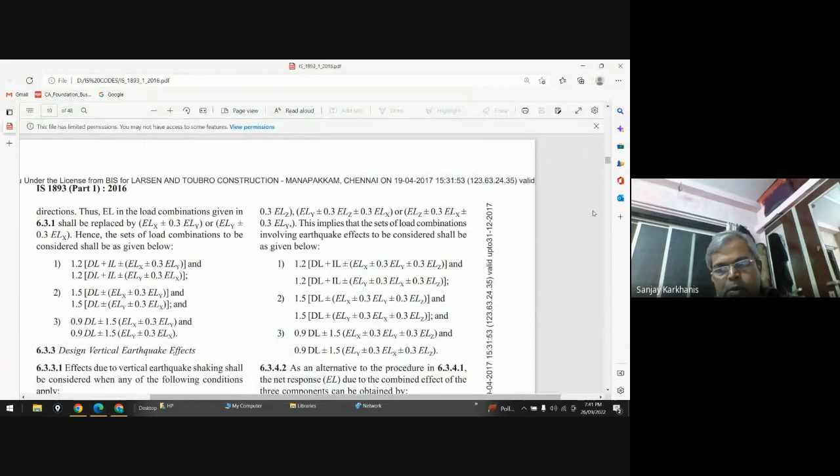Okay, so let us open that code. I have already opened it, and you can see, so this is the code. So let me go to this. This is the criteria for earthquake resistant design of structures, part 1, general provisions and buildings.

That means there will be part 2, part 3, and you may see. So this part 1 is dealing with general provisions and buildings. Another part may be dealing with bridges or some special structures, stack-like structures, etc. So if you want to go for codal provisions regarding 1893, you will have to see part 1.

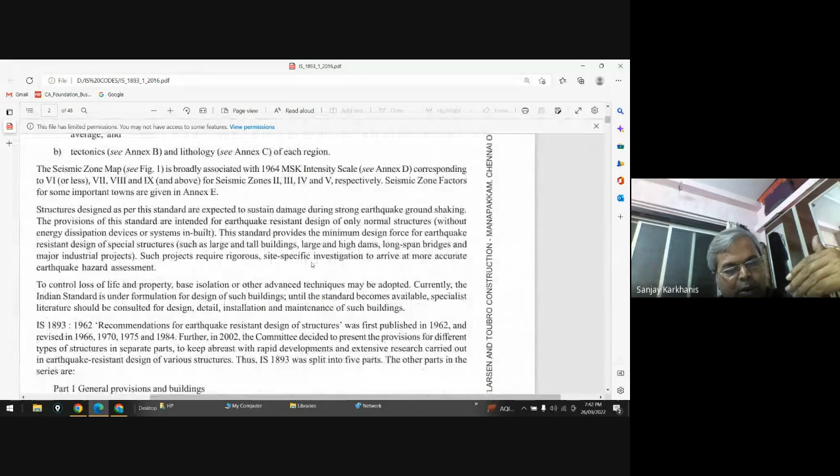So you can see that this is a sixth revision, and you will find the scope of this codal provision. You can see that primarily it deals with earthquake hazard assessment for earthquake resistant designs for buildings, liquid retaining structures, bridges, embankment, retaining walls, industrial and stack-like structures, and concrete, masonry and earth dams.

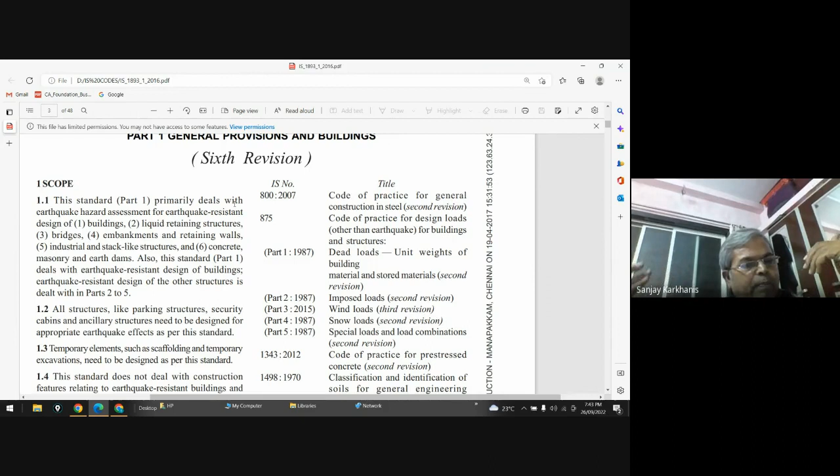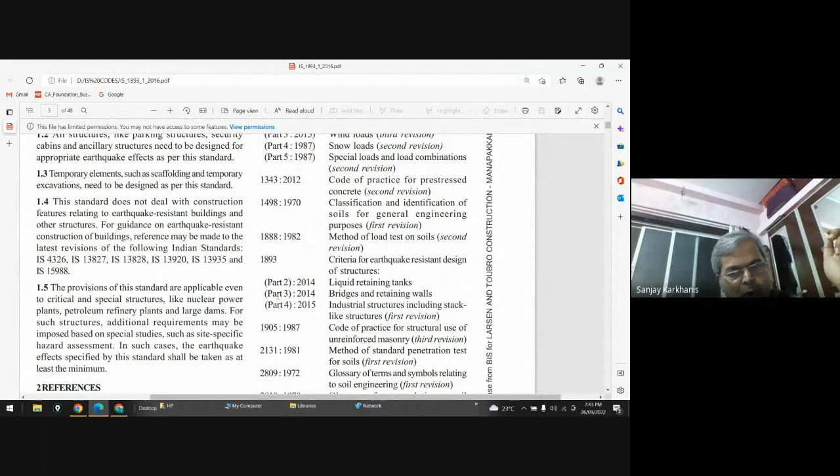This standard, part 1, deals with earthquake resistant design for buildings, and earthquake resistant design of the others is covered in parts 2 to 5. That means 1893 is divided into part 1 to 5. You can see that part 2 is liquid retaining tank, part 3 is bridges and retaining walls, part 4 is industrial structures, and then these are the references which I was working with.

Then you can see the terminology section. So if you see here, it starts with terminology - whatever definitions are given, and these definitions you will see in various books also, but for this reference they have included them here. So what do you mean by closely spaced modes? Particularly this I would like to look at, and I would like to have a few comments about this.

You can read it, but conceptually, I will try to show you that closely spaced modes of the structure are those natural modes of oscillation of a structure where natural frequency differs from each other by 10% or less of the lower frequency.

Now let me show you that. Let us say you have defined one structure - let's say this could be a structure something like this, 1, 2, 3, etc., whatever it may be. And with respect to free vibration analysis, you have found omega 1, omega 2, then omega 3, etc., then omega 4. So let's say these are the circular frequencies of the first 4 modes of vibration that you have analyzed with that vibration analysis.

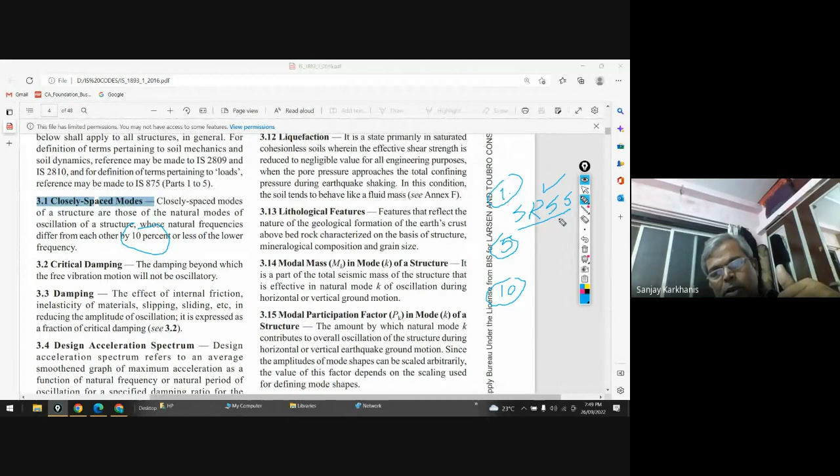But if the frequencies are very close to each other, let's say 1.05, 1.07, or 1.1, that means the code has given you 10% or less of the lower frequency. Then this SRSS method cannot measure the effect of mixing of one frequency, or the interference of one frequency on another frequency. So this method cannot properly detect that effect.

That's why you are using CQC. So calculation of SRSS and calculation of CQC, I will say, is an advanced process.

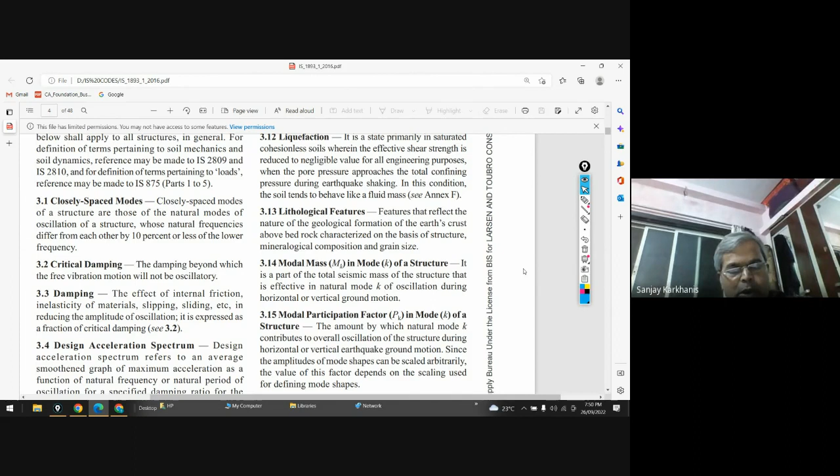So now you can read this closely spaced mode definition. In your interviews, one may ask you why you are calculating closely spaced modes, or why you want to check whether the calculated frequencies are well separated or they are mixed with each other. What is the necessity? And then you people will not understand if this concept is not known to you, right?

Okay, yes sir. Now this is about critical damping. What is damping? The effect which decreases the oscillation over a period of time is called damping, through physical friction of the medium.

Actually, damping is a very complicated process. A lot of things are coming into picture so that the damping effect occurs. Now we are not interested in finding all the parameters of why damping comes into picture. We are just interested in what is the effect of damping. So, the effect of damping is a reduction in amplitude.

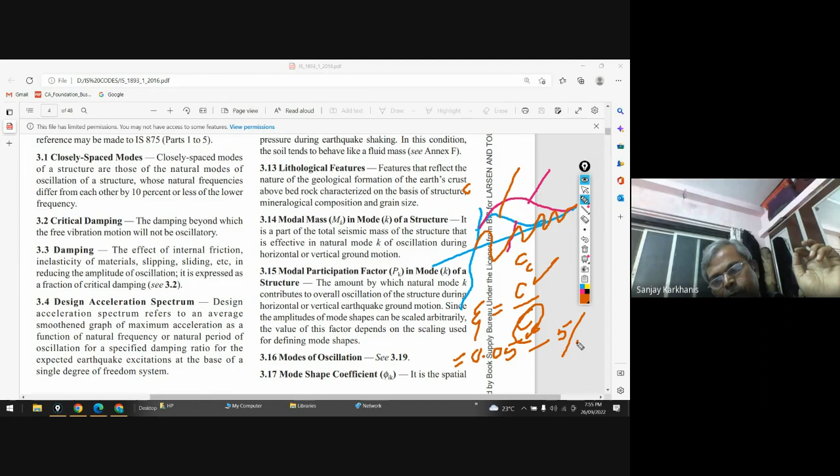Yes sir. And that's why whenever you are going for your ETABS model, it asks what is the percent of damping. That percent of damping is nothing but xi, a value of xi expressed as the ratio of actual damping over critical damping, and critical damping is defined like this.

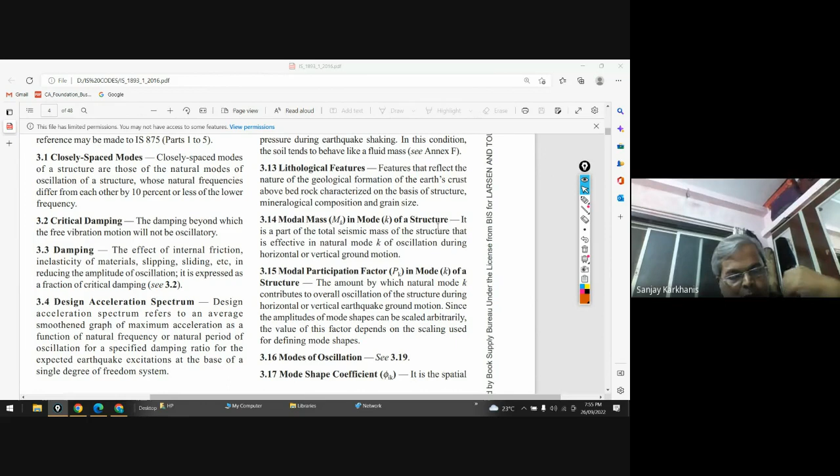Yes, I think conceptually you are getting into the scene or not? Yes sir. Are you getting bored? No sir, not getting bored.

Okay, no problem, a little boring I will make it because that's my right. The effect of damping as defined in our code, the effect of internal friction, inelasticity of material, slipping, sliding, and whatever may be, all these effects which reduce the amplitude of oscillation are expressed as a fraction of critical damping.

And exactly that is what I have given you as C upon CC. C is actual damping, and CC is critical damping, and damping is expressed in ratio xi. So this xi is nothing but damping.

I have explained this design acceleration spectrum, which is the average smoothened graph of maximum acceleration as a function of natural frequency and natural period of oscillation for a specified damping ratio for expected earthquake excitation at the base of a single degree of freedom. This is very important, and I would like to spend a little bit time on this.

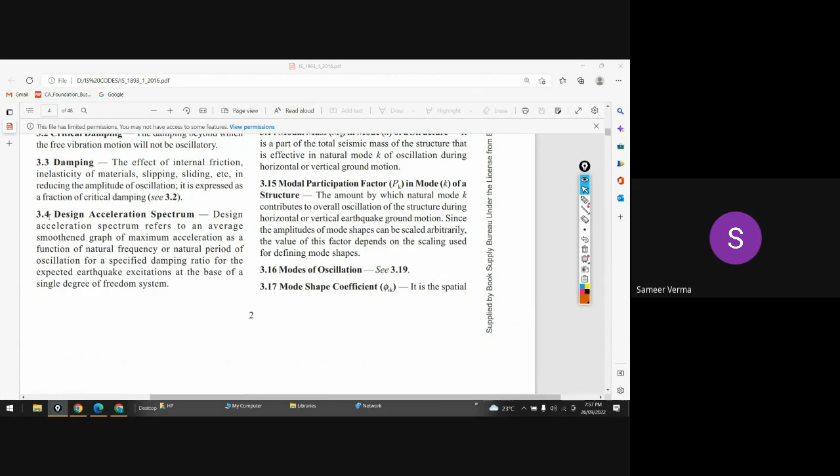Have you understood this? Yes sir, design acceleration spectrum, but why it is defined and how it is used.

See, my question is that when you are going to study the effect of earthquake on various buildings, you will see that earthquake is very notorious, and every time it is having different parameters. Let's say you are staying in one area, and that area is subjected to earthquake. Now that area may get subjected to earthquake from any distance.

As the focus is near to you, you will be subjected to higher vibrations, and you don't know where the focus is, because if you try to visualize the earth, you will see something like this. Inside the earth, there may be anywhere a focus, and you may be anywhere on the periphery of the earth. So you do not know anything.

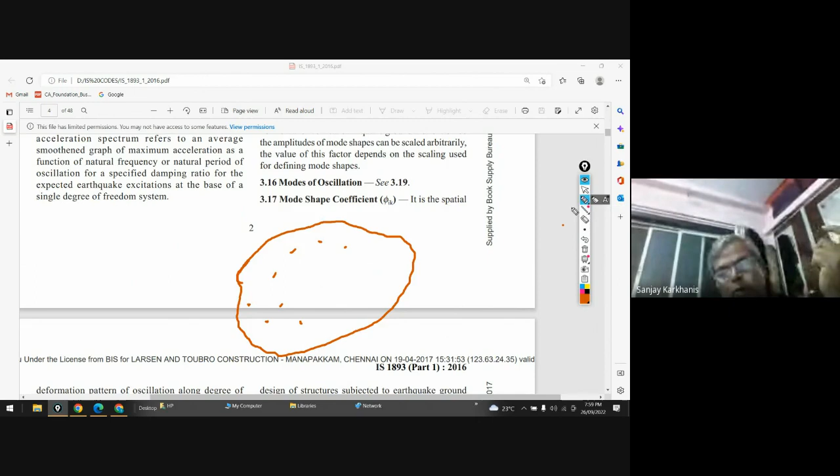So how are we going to analyze things where we do not have any information? That's why some standardization has been prepared. Because every earthquake will be different, let's say this is the surface of earth, and there is a building something like this, then there will be another building, then another building. Now every building is having different parameters.

Are all buildings the same? No sir, requirement will be different. This may be a residential building, this may be a hotel, this may be some part parking, some part commercial, some part something else. You may have a huge structure, maybe a stadium, maybe a theater, etc. So every structure is different.

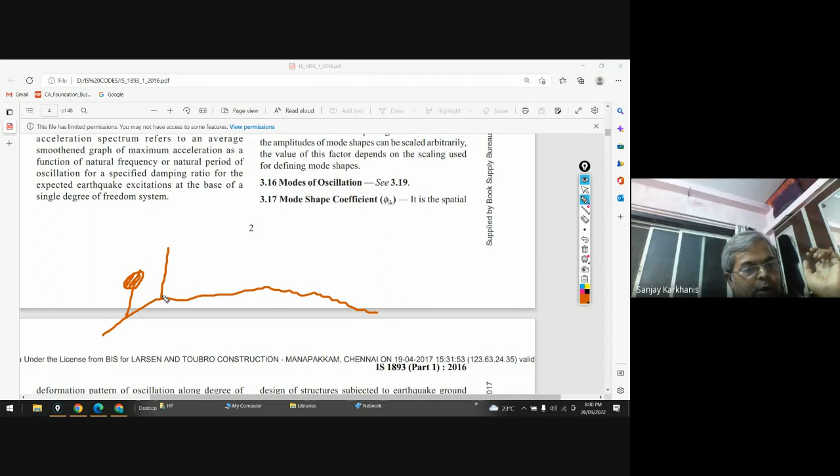That's why they say let us find the effect on a single degree of freedom. So they are considering this as a theoretical structure, this as another building having single degree. Now we are not talking about multi degree, we are having single degree structures.

So all these are single degree freedom systems. We are representing the building as a single degree freedom. So this will have one frequency, this will have another frequency, this will have another frequency, and I am talking about the character of the building.

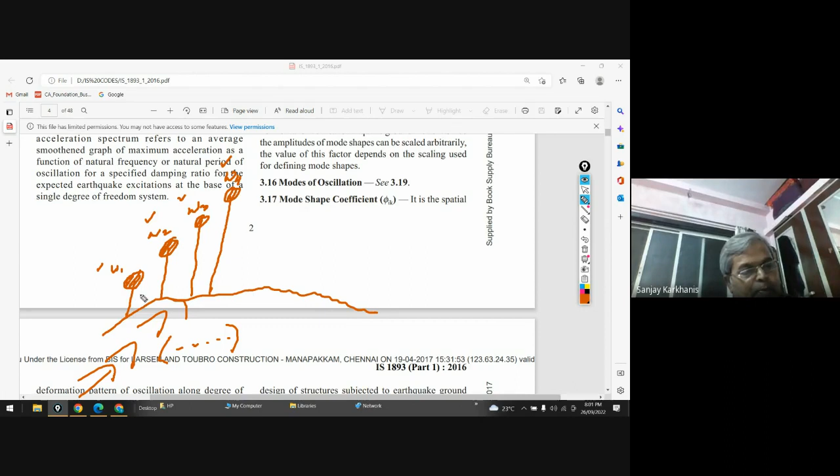And now there will be an earthquake. This earthquake itself will have a bunch of frequencies. Few frequencies may be near this, maybe near this, maybe near this, and maybe near this. And the building will get distorted or deformed to its higher level only when the frequency matches.

Let's say f1, f2, f3, etc. So there are n number of frequencies that this earthquake is carrying along with it, and earthquake is changing its frequency at every fraction of a second. It is not that earthquake has only one frequency, it has a bunch of frequencies along with him, and every fraction of a second it is changing its frequency.

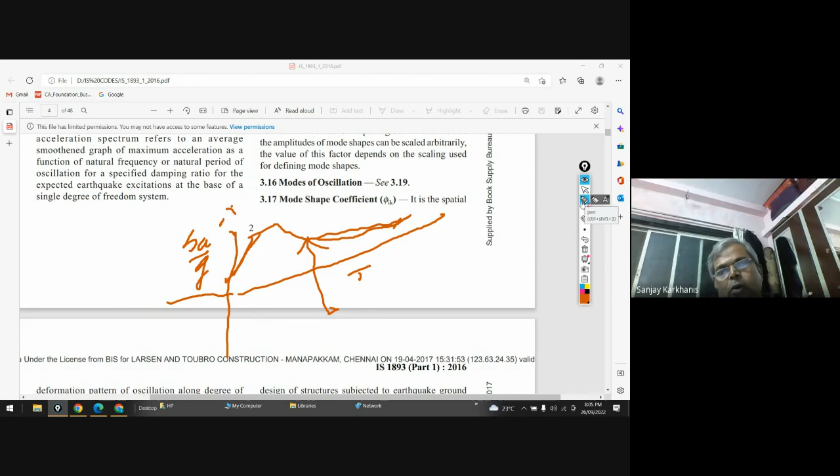Many times when I ask people how you can use this response spectra to analyze your building for some probable earthquake, because you are designing a building for some future earthquake to safeguard it against one which has not yet occurred. You will get the data only when that activity is exercised. Then how do you say on what basis your building will resist? Because this response spectra is having...

n number of earthquakes. Let's say this is one earthquake, and this is the data of available earthquakes. Then there will be another earthquake, so maybe something like this. Then there will be a third earthquake.

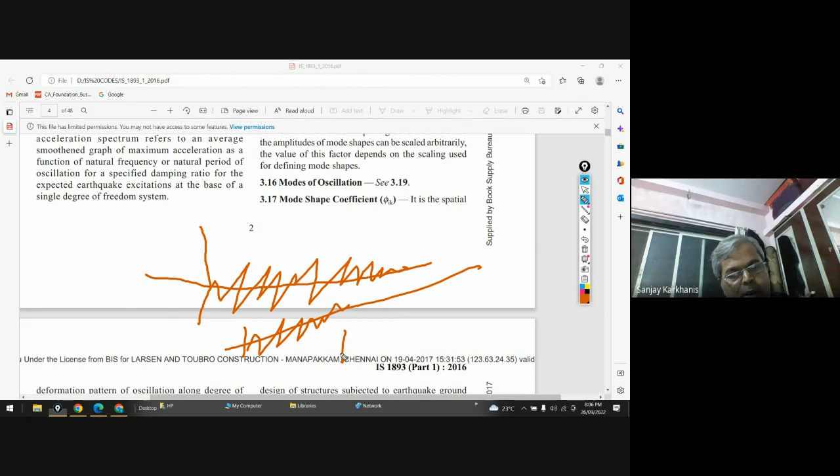Yes, sir. That's why we can see that at least, though I don't have data of a future earthquake, still I can predict, because I have gone through thousands of previous earthquake data which has been analyzed, and some information is drawn with that, and that is why this design acceleration spectrum means number of such earthquakes.

And why it is called design? Because it is not truly representing any actual data, it is representing an average smoothened data.

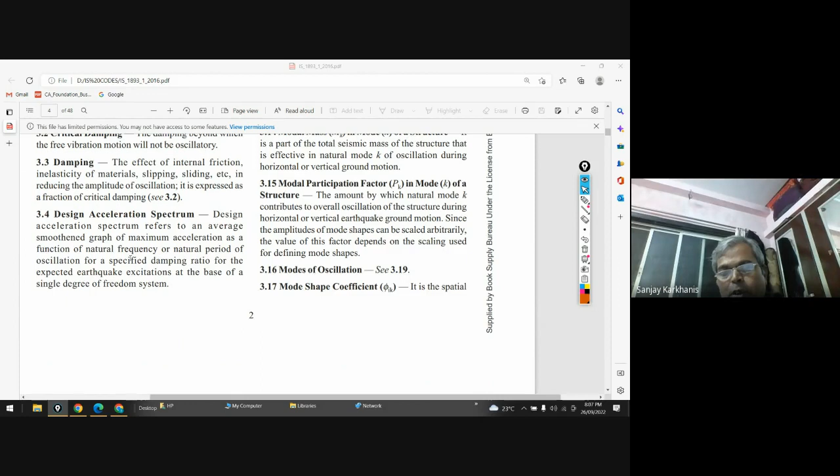Is this concept clear to you? Average smoothened data. Yes sir. So it is not actually representing any data. Say, with actual calculation you are getting your structure something like...

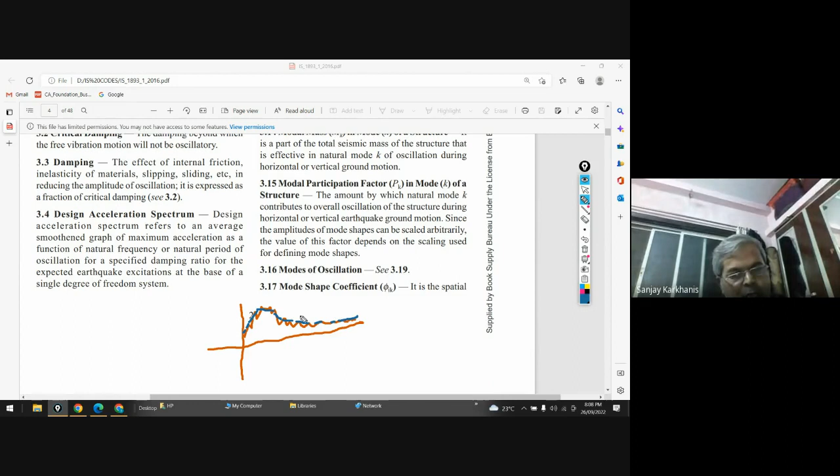So this output, which has been the outcome of various earthquakes, it has been smoothened, like this, and that's why you can see this blue line is this design. That's why it is called design spectrum, and it is of acceleration. That's why it is called design acceleration spectrum. Clear? Yes, sir. Okay.

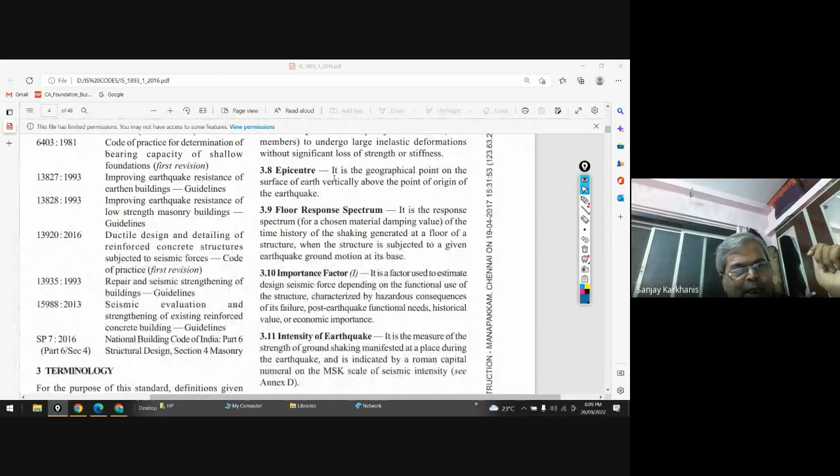So like that, you can go through this: acceleration, horizontal force, ductility, you can go through this. You can go through epicenter, then floor response - this is not used by us most of the time, so you can ignore it. Then importance factor, you can see that.

Now you may have some more information about intensity of earthquake. What is the difference between intensity of earthquake and magnitude of earthquake? You can go through the books to understand. Try to read the book, and if you do not understand, next time I will explain the difference between intensity and magnitude of earthquake, right?

Now, how is intensity measured? Intensity is measured with respect to the damage that has been considered. So that damage is defined in 1 to 12 categories.

It's not because of the earthquake, it's because of whatever situation on the ground you are having. Let's say if any desert has been shocked by the earthquake, what will be the damage? There will be no damage because there are no human activities in the desert, right? Are you getting it?

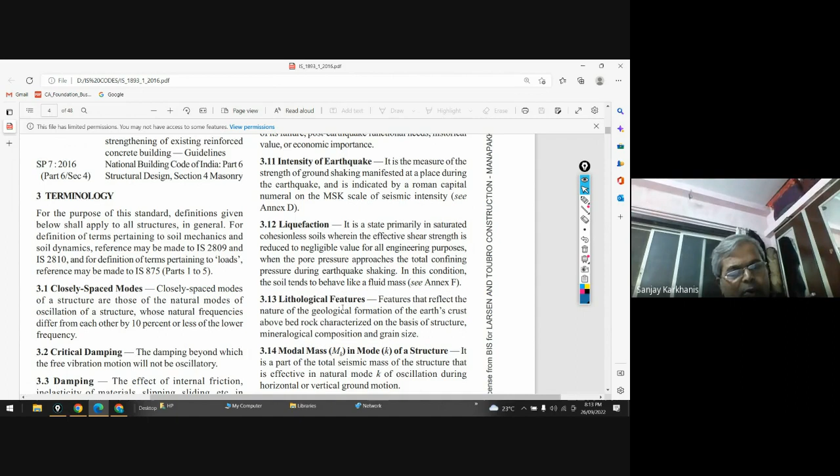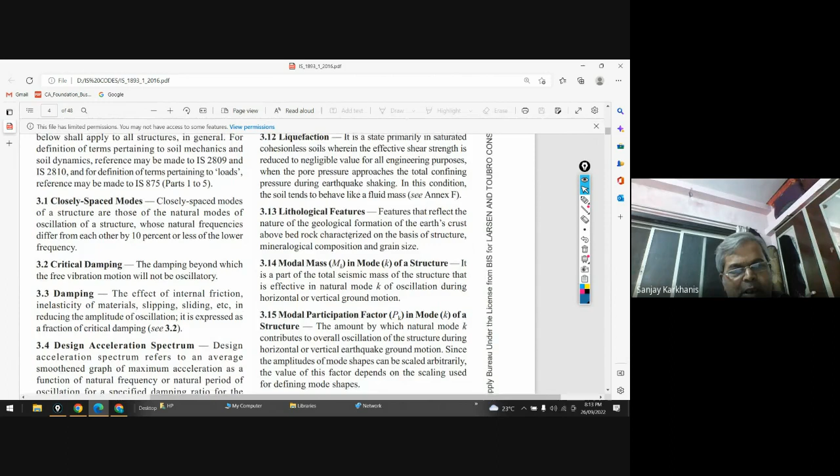Don't look into liquefaction because it is a rare activity. If you are interested in lithological features, then you may go through them, since that is a part of geology.

Here you can see modal mass. I have already explained this concept, so I'm not going to repeat it - modal mass, modal participation factor, modes of oscillation, mode shape coefficient. I have already explained all these things, so you can just go through this.

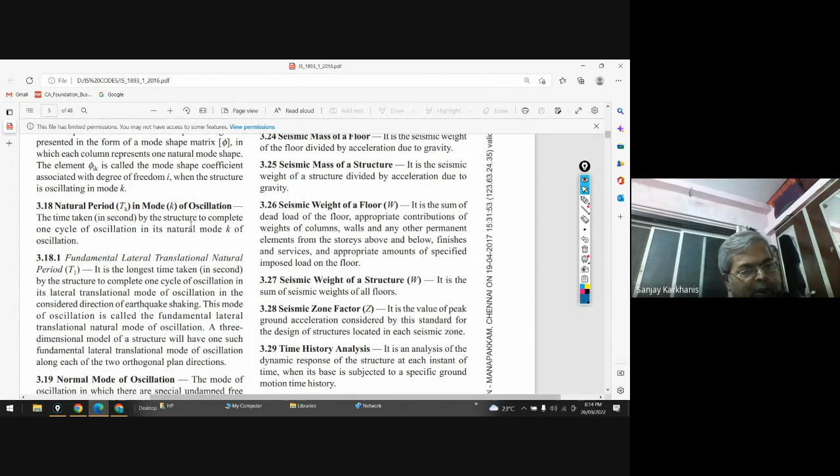What do you mean by natural mode period or natural period of mode K? Also fundamental lateral translational natural period, and modes of oscillation - these are the definitions.

Peak ground acceleration - this is a concept where a number of people get confused. It is expressed as zero period earthquake or zero period earthquake intensity. How can I define it? We'll work on it later. Even if you do not understand much about this right now, try to ignore it till your understanding level keeps increasing.

One thing is there - I have observed people do not read this codal provision because the moment they start reading it, they find it very difficult, and with a number of terms they do not understand, they feel that this is not meant for them, and they quit. Don't do that.

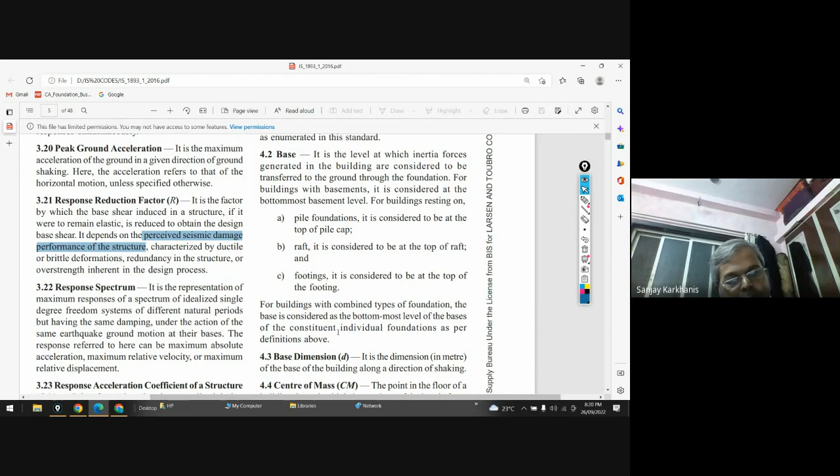And where it is related। मैंने आपको बताया था कि यू कैन नॉट डिजाइन अर्थक्वेक प्रूफ स्ट्रक्चर। सो उसकी वजह से वी हैव अ प्रोबेबिलिस्टिक अप्रोच, and the approach is that if the structure is subjected to minor earthquake।

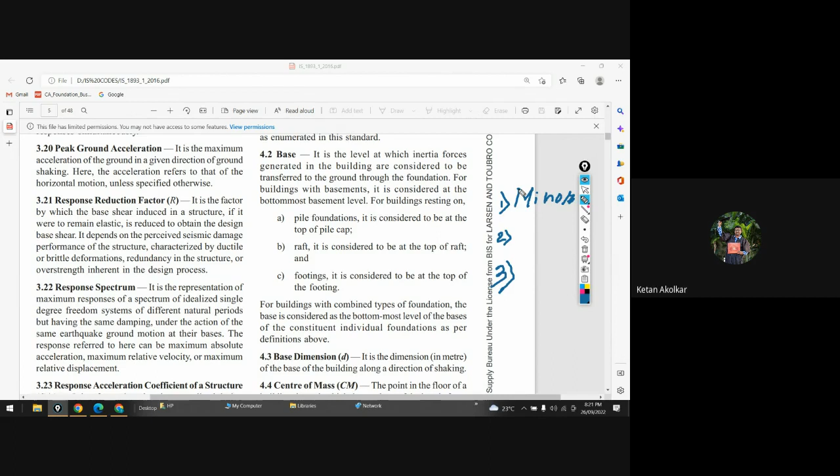छोटा मोटा होता है ना, ये ढाई-3 रिश्टर स्केल वाला। आप लोग हैं कि नहीं मेरे साथ? Okay, see a structure, you don't know what intensity of the earthquake your structure will be subjected to। तो आपने क्या किया कि मान लो आपका स्ट्रक्चर माइनर अर्थक्वेक को सब्जेक्ट हो जाता है, which is something around 2 to 3 Richter scale।

सो ये जो इंटेंसिटी है ना, दिस इज कॉल्ड अ माइनर मैग्नीट्यूड ऑफ द अर्थक्वेक, यानी माइनर अर्थक्वेक। थोड़ा सा हो जाता है, एक 2-3 सेकंड या 5 to 10 seconds, and then things are okay, normal। So when the structure is subjected to such minor earthquake, the probability is almost more than 70% that your structure will be subjected to this, maybe within 1 or 2 months, or once or twice or thrice in a year, which we do not notice। बट अगर वहां सिस्मोग्राफ अप्लाई करेंगे बिल्डिंग में, तो हर 2-3 महीने में आपको उस अर्थक्वेक का सिस्मोग्राफ मिल जाएगा। So the earthquake is there, but you don't notice, and under that type of structures, your structure behaves in elastic manner।

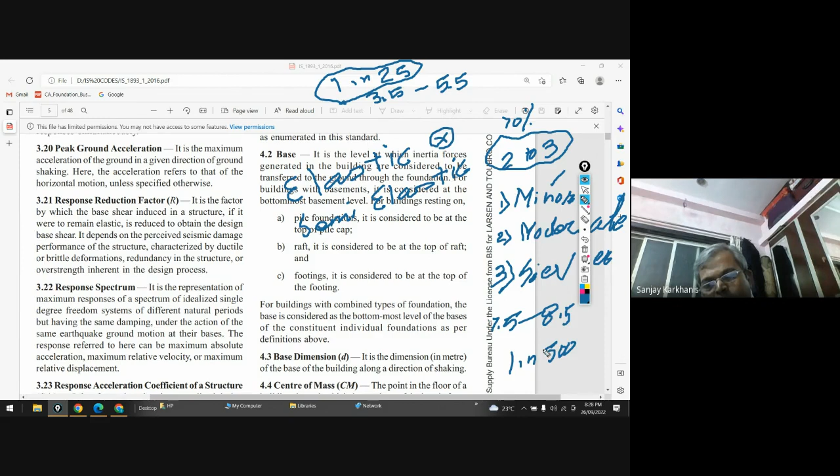Under severe shaking, a strong jolt, under this severe condition maybe something more than 7.5 to 8.5 magnitude. This is severe, and the probability of this is 1 in 500 years, maybe, or 1 in 1000 years, or 1 in 250 years.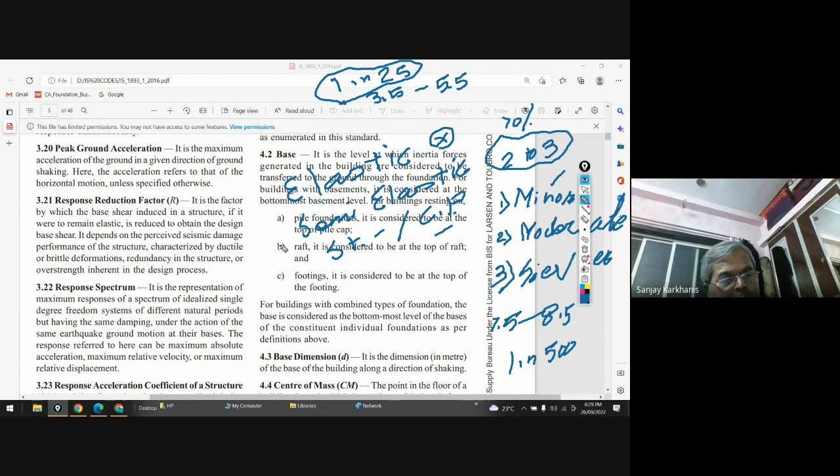In that case, structural members also get damaged, but the building will not collapse. So collapse is prevented, CP, so that people in the building will not lose their lives, but they will survive and get enough time. That is all defined in perceived seismic damage performance of the structure.

Clear? Clear, sir. Now this perceived seismic damage performance of the structure is characterized by ductile behavior. That is what I was saying. I am not going to allow brittle deformation, but I will allow the structure to behave in a ductile manner, and then there will be redundancy in structure.

You know what is meant by redundant structures. Because of that also, the structure is having a factor of safety, and you are not designing the structure only for the exact required strength. You are going for over strength, designing for some higher value. So that is also called over strength inherent in the design process.

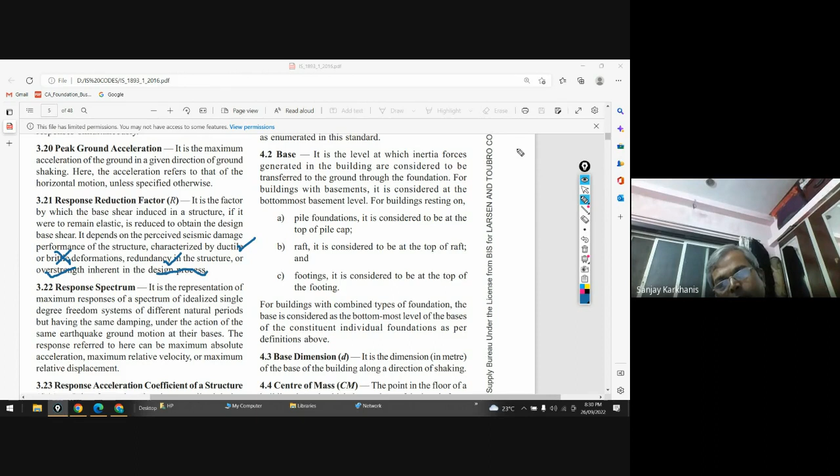I think you will enjoy reading that. Yes, sir. So this is how you have to read this.

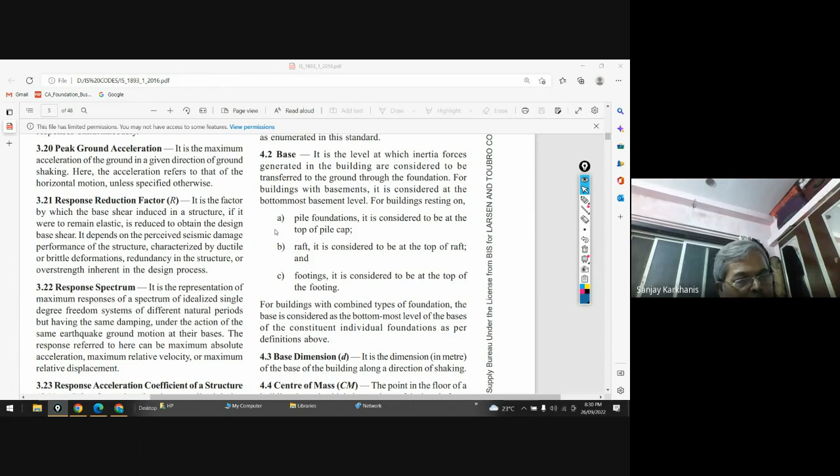Then I have given enough information about SA by G. Then you can see all the rest of the structures. You know all this, I think we have covered all this.

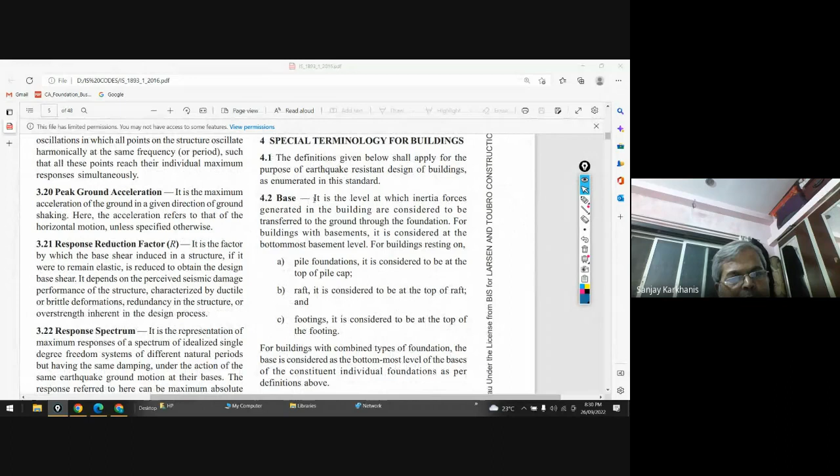So the main special terminology for building is base. What do you mean by base? Then base dimension, center of mass, then center of resistance, then eccentricity, we have talked about it. Then design base shear, then diaphragm, height of floor, height of building.

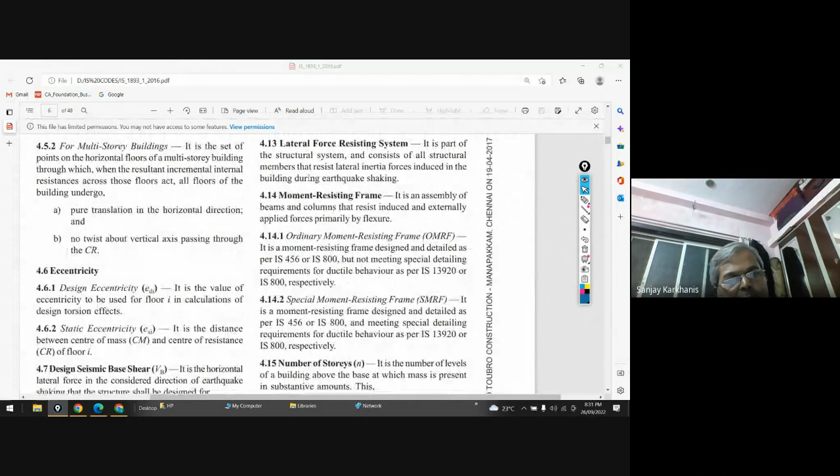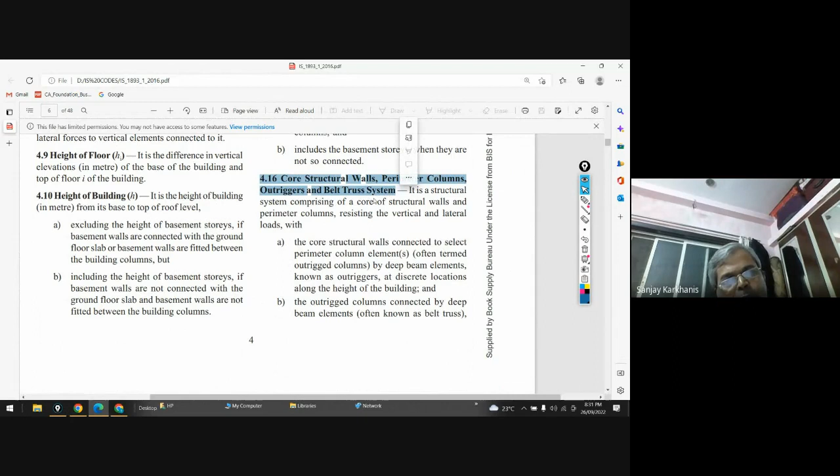Then you can go through horizontal bracing system, joints, then lateral force resistance system, moment resisting frame, then the various parts. You can read it and you will understand it. If you do not understand this section 4.16 initially, you may ignore it for a few days and later you will start understanding this.

Then you can see principal plan axis, then this P-delta effect. If you do not understand P-delta effect right now, forget about it, you will understand it later. Then RC structural wall, we have talked about it. Then story, then what do you mean by soft story, weak story, and drift.

I think we have talked about this, and will also, let me show it with the concept. Let's say this is your floor, and earthquake force is subjected. The lateral forces due to earthquake are acting in this direction.

Because of that, let's say you're having displacement like this. So this is your delta 1, and this is your delta 2, the lateral deflection. Okay, and this is your floor height, let's say H. Then delta 2 minus delta 1 is called relative displacement.

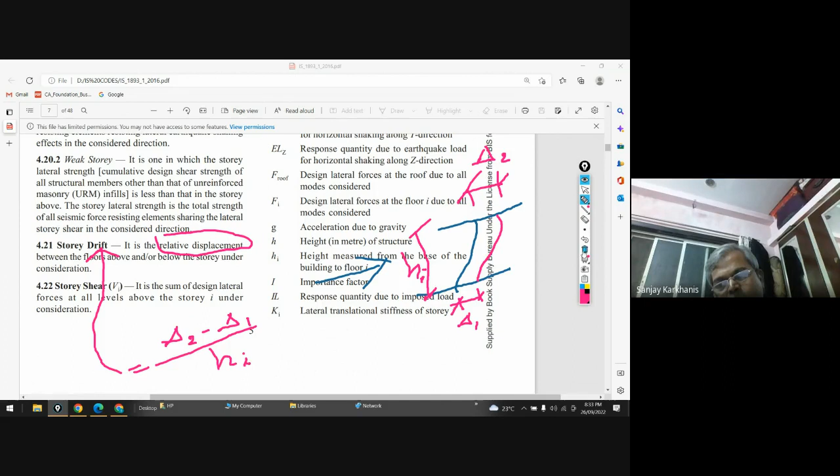Is this easier? Yes sir. Clear or not? Yes, clear sir. So now, if you get the model, you will analyze the model and find the story drift, and then you will understand the meaning of that.

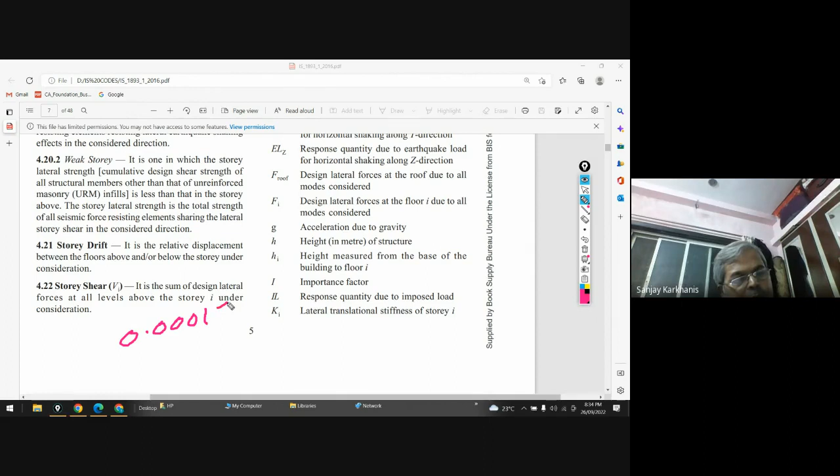Why I am showing you this is the reason for that is only this: you can say that in ETABS, you are getting a story drift value like delta 1 minus delta 2 divided by H. ETABS will always show story drift like this, so it doesn't have any unit, because delta 1 is in length unit and H is also in length unit, so that's why it's a ratio.

And there is always a confusion, people do not understand this value. They say, oh, the value came very small. But try to understand that it is delta 1 minus delta 2. If you see this in mm, you will be confused, you will think it came very small, but that's not the case. It's not with unit, because it is delta 2 minus delta 1 divided by h, which is a ratio, and based on that you can find the displacement. So relative displacement divided by floor height, that is story drift.

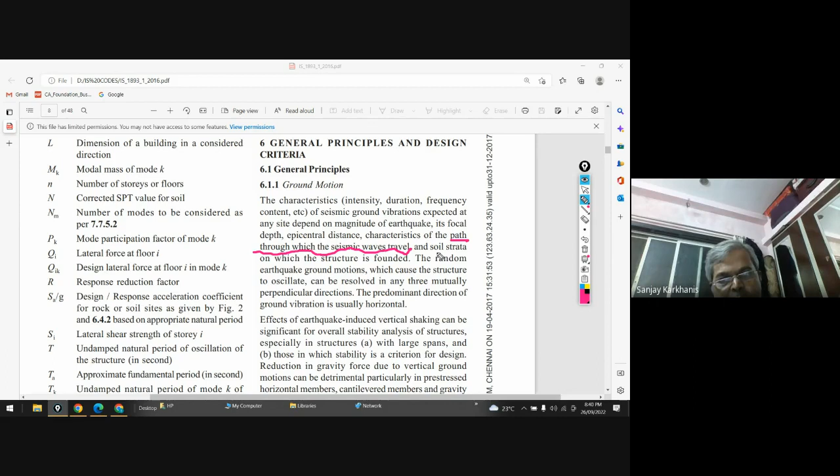Okay, so as this changes, this is what is called the path. What is the path? Wave. See, the wave is going like this, and this wave is obstructed, the medium will obstruct the wave. As you know, water lets the wave pass quickly, rock will take time, or if there's a gap in between, it will flow immediately. So that means material matters. So that is exactly the path through which seismic waves are traveling, soil strata on which the structure is founded, and random earthquake ground motion.

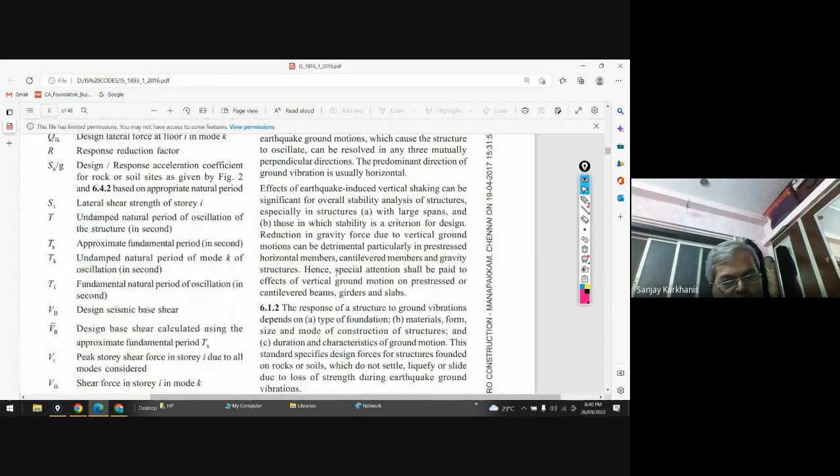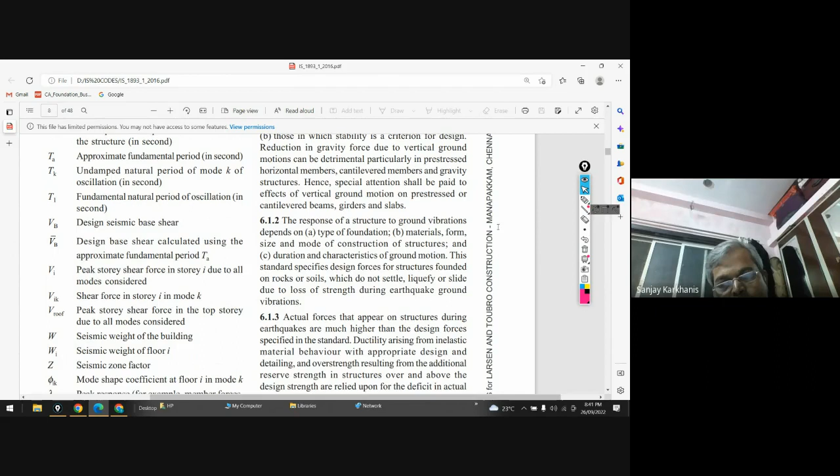So all these, I'm just mentioning the things. I won't be able to explain everything, but let's see what I can explain. So you can go through this, and if you do not understand, you can ask me specifically. If you've read it 2-3 times, even written it once, and still don't understand, then we'll have a separate discussion on that. Clear? Yes sir, okay, then you can go with this.

So this is about soil structure interaction. Don't go into that deeply because we are not using soil in our analysis. What is soil structure interaction? The structure is resting on earth, or earth is supporting the structure, and the earth is subjected to earthquake. Because of that, the nature of soil and different earthquake characterizations come into picture, causing the superstructure to vibrate. That effect is again transferred to the soil, and the soil transfers it back to the superstructure. That is called soil structure interaction. It's a complicated concept, you may keep this aside initially; later you will understand it.

People interested in earthquake engineering have done separate research, n number of theses only on soil structure interaction, and many have got their thesis sanctioned and received PhDs for it. So it's a vast topic, but if you're interested you can go into it, or if not, you can leave it. That will not hamper your normal analysis process.

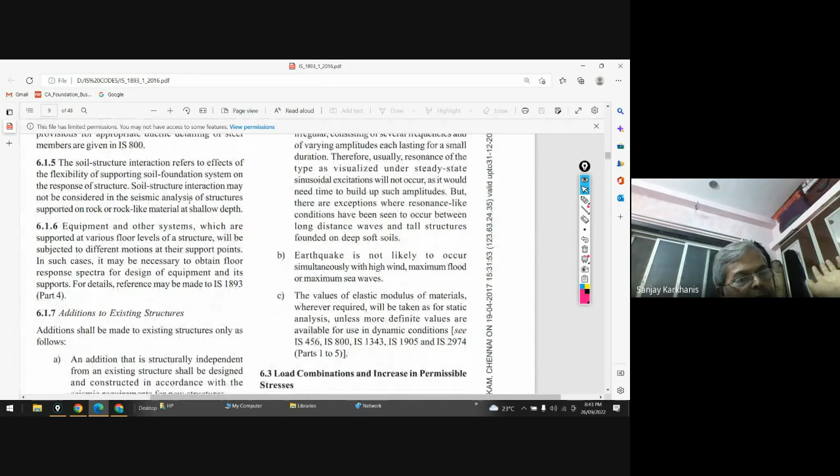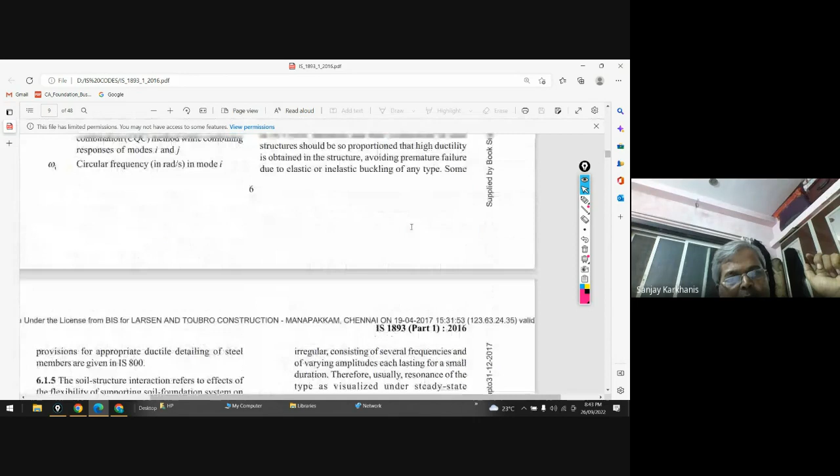Then equipment etc. you can go through. Change of occupancy is not required. You can go through these assumptions also, because these assumptions are important. Just go through that and you will find a lot of important understanding.

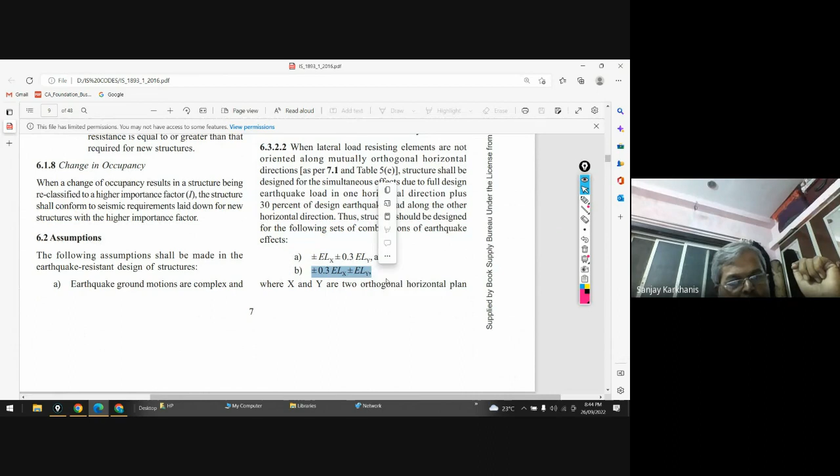Then load combinations, we have talked about this, and these are the load combinations. You can see ELX plus 0.3 ELY and 0.3 ELX plus ELY. Where did this come from? You can understand that over here. So these are the basic combinations, and with the help of these only we have developed all those 50 or 64 combinations. You can check and find it over here.

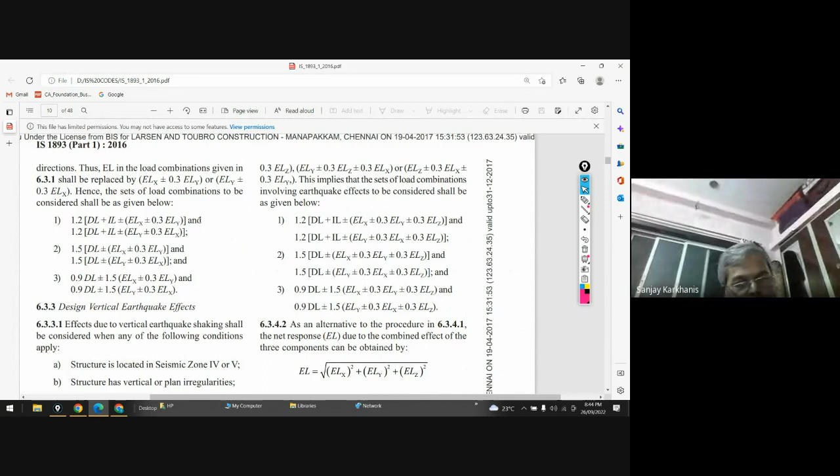Many people ask why we are not considering vertical earthquake effect. The clause 6.3.3 says that effect due to vertical earthquake shaking shall be considered when any of the following conditions apply - that means whether your structure is located in zone 4 and 5. In zone 4 and 5, you are supposed to analyze the structure for vertical earthquake effect also, that means EQX, EQY, and EQZ also. So that is one condition.

Another condition is when the structure has vertical or plan irregularities, meaning a very complex structure, you may say a complex architectural configuration - in that case also you will have to carry out analysis including vertical earthquake. Then structures resting on soft soil - you have seen type 1, type 2, and type 3 soil. If your structure is resting on type 3 soil, then you will have to carry out vertical earthquake analysis, find out the vertical earthquake effect, and take care of that in design.

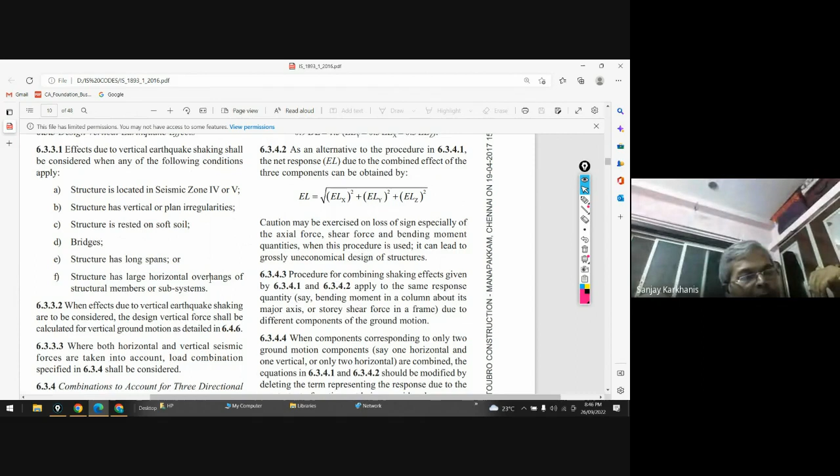Then bridges, and structures having long span. Even in residential structures, if the span of your beams or slabs is more than 10 meters, you will have to check this vertical effect. And horizontal overhangs - normally I ask architects to get rid of unnecessary overhanging balconies. Don't go for overhanging balconies, and don't go for unnecessary overhang in subsystems. If it is giving you some additional benefit, then you can go for it, but then you will have to analyze your structure for vertical earthquake also. Clear?

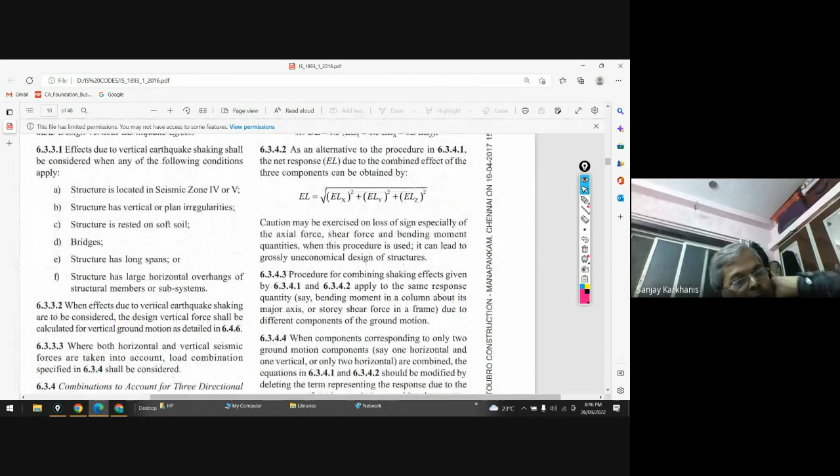Yes sir. Then this is about combination for three directional earthquake ground shaking - that's what we provide in directional combination. You might be recalling that whenever we were feeding information to our software ETABS about earthquake in dynamic analysis, we were saying that when modal combination is to be considered, go with CQC, and when directional combination is considered, you can go with SRSS. So that is this directional earthquake ground shaking, right?

It has effects in X direction, Y direction, and Z direction. If you want to combine all that, you will have to consider ELX plus 0.3 of ELY plus 0.3 of ELZ if you are going for 3D. Otherwise, 30% orthogonal effect. Clear? So one time plus, one time minus.

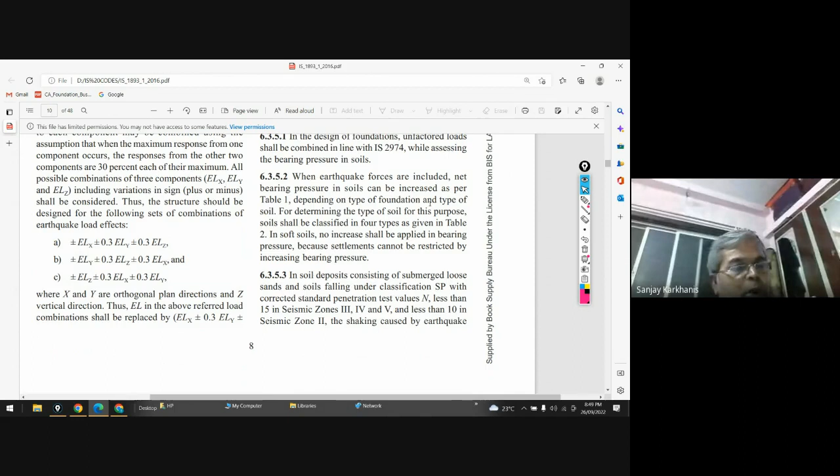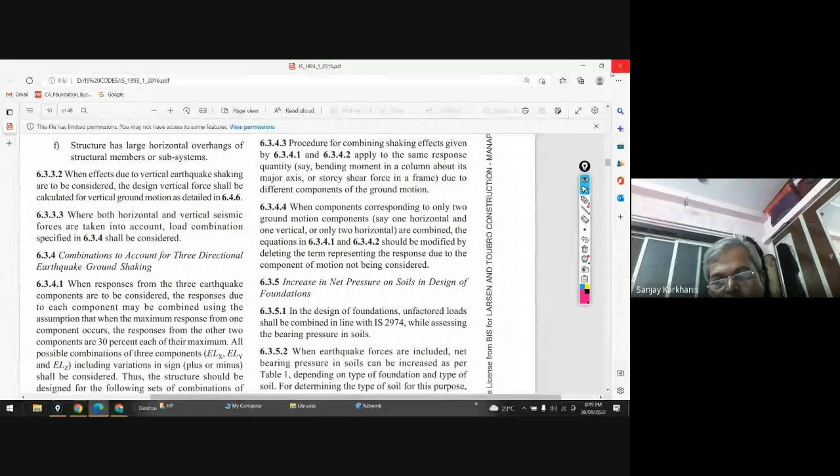But right now we don't have any problem, because finding the worst combination among all those results is the duty of software. So you can go ahead. Otherwise, manually it becomes very, very tedious. I'm not saying difficult, but tedious. So with this, you can go ahead and you can check.

And now all that we have seen in our PPT, you can correlate it with this design acceleration spectrum value, this Ah, Z by 2, Sa by g. We used to say earlier, we used to say I by R. Now we are saying divide by R by I.

I have not understood why it has been changed. Finally, it's saying the same thing, isn't it. Whether you write R by I in the denominator or I by R in the numerator, it is one and the same, but I have not understood why it has been changed. And earlier it was not like this.

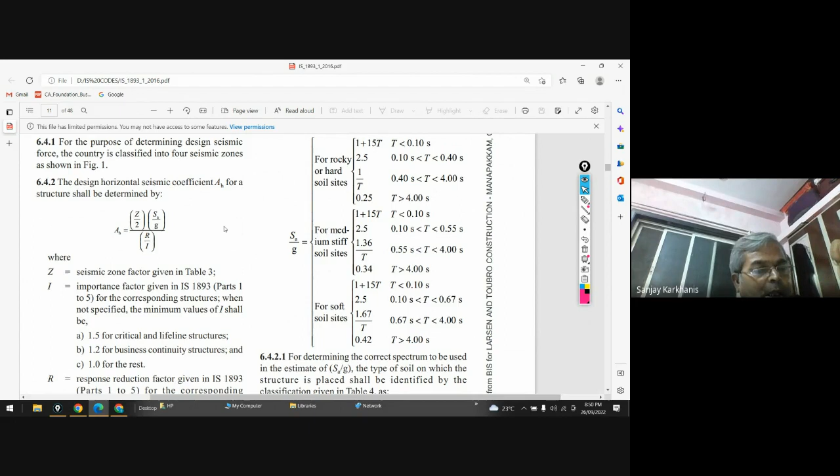So in 1893, 2002, it was written whatever we have given you, I by R. But now they have changed it and they say that Z by 2 into Sa by g divided by R by I. The only thing, probable thing that I want to say, but I am not confident, because nobody confirms this to me. I have asked a number of experts in this field why this has been changed.

But according to me, the code wants to have a parameter R by I, because in one case you are increasing importance factor, that is you are increasing it from 1 to 1.5, maybe 1.2, 1.3, 1.4, 1.5, and in another way you are reducing the response. So finally, such that R by I doesn't go beyond some value of 5.

Are you getting it? Yes or no? Let me do it. See, my approach is always that I used to say let us put it in a figure and find out what will happen. Let's say I'm not changing anything over here, so I'm not worried about this. Let's say my R is equal to 5 and I is equal to say 1.

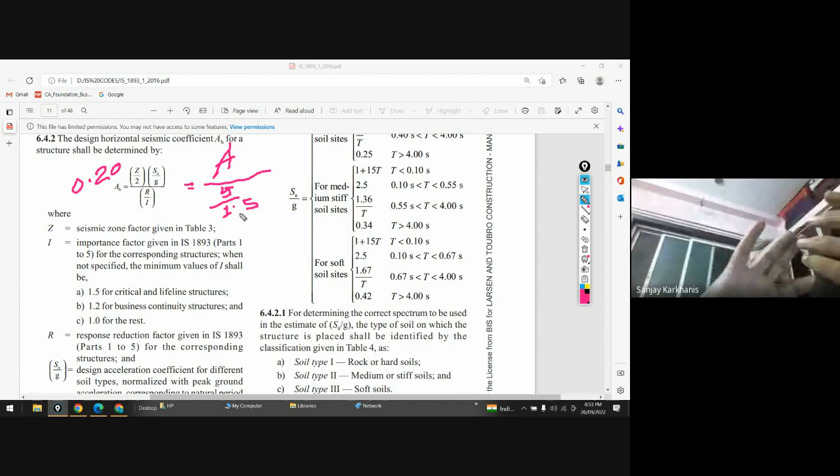What will happen if instead of that I'm going for R equal to 5, but now I'm increasing importance to 1.5, whether I am on safer side or I'm on unsafe side? What will happen? Finally, how much is this value? Yes, anybody? Just answer me, 5 divided by 1.5 is 3.33.

3.33, that means now under importance conditions, see, for residential building I'm going for 20%, and for important buildings I'm going A divided by 3.3, means 33%. So I'm increasing the base shear.

What will happen if I go for R equal to 3 and this equal to 1.5? So it will be 50%. See, 3 divided by 1.5, it will be 2. That means A by 2, that means 50%. Yes or no? Yes, sir.

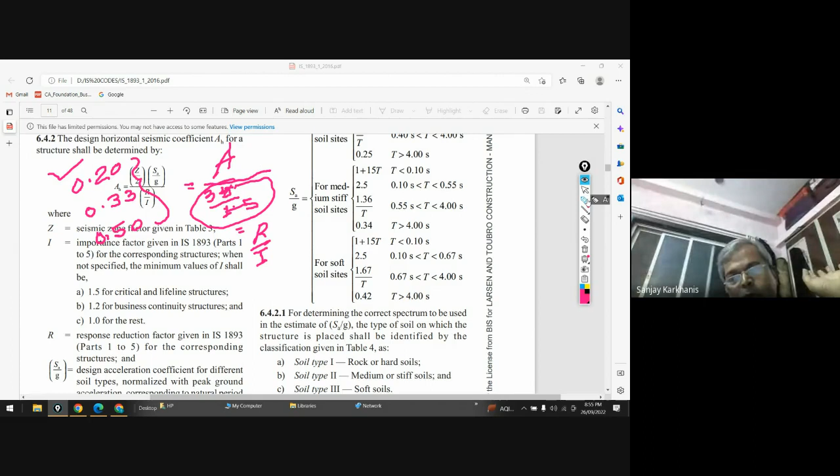So that is how I have analyzed, but I don't know whether my analysis is correct or not, because I tried to confirm it with 4-5 prominent experts in this area, but they say 'we can't tell, leave it, the code has given you R by I, just keep it as it is.' But I feel the code wants this some value. You should think a little more about this, it would be good.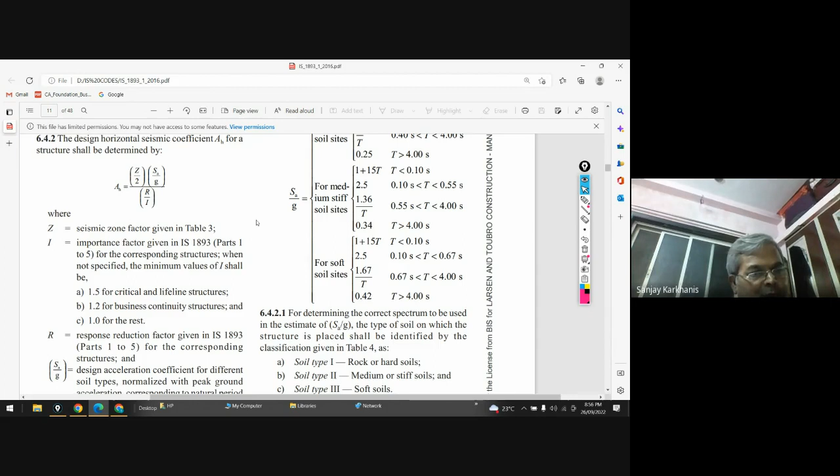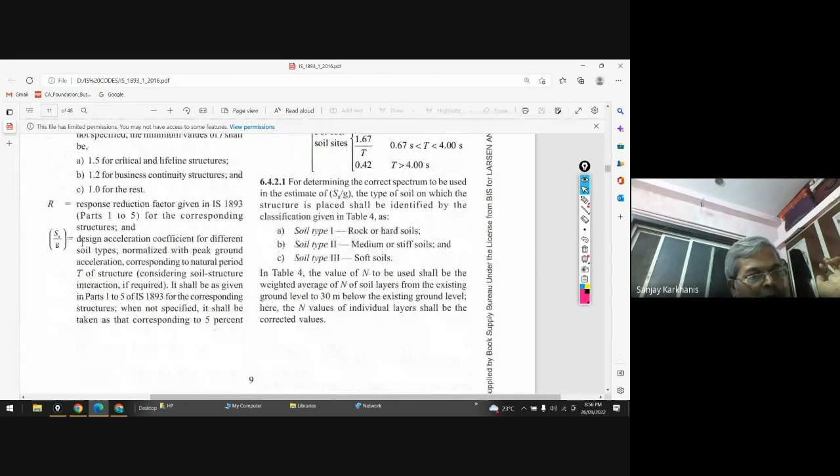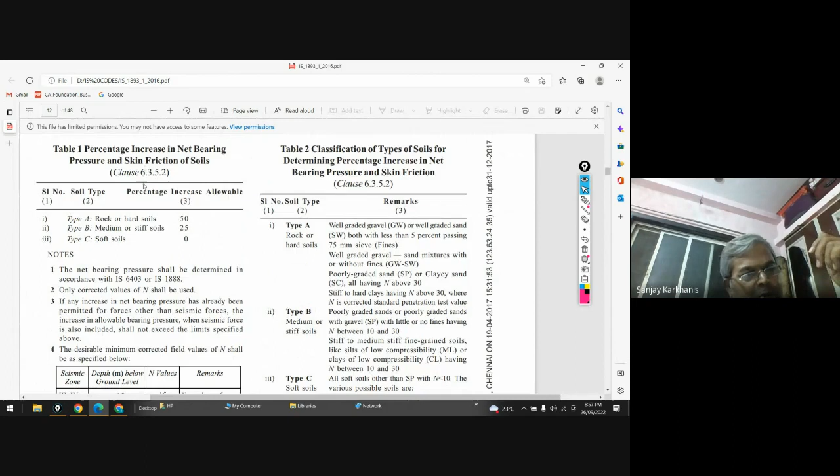You can read this and you can go with this. Now you can go through this and you will see that little bit difference. Okay, this we have discussed already. So percentage increase in net bearing pressure. No, don't worry about this. You may leave it as it is.

Okay, so these are the seismic zone factors. You know that second, third, fourth, and fifth. So this might get changed after few years, because then we'll be having additional information, and based on that, it might get changed. So don't consider anything in this as stationary, because if you start the entire process of this 1893, you will see that the first thing is that this is the sixth edition. That means earlier there are five editions, and you will see that in every edition there are some advantages. कुछ पिछला निकाल दिया है, कुछ ऐड किया है, कुछ मॉडिफाई किया है, कुछ टोटली outside kiya hai. So that is how the science goes on working.

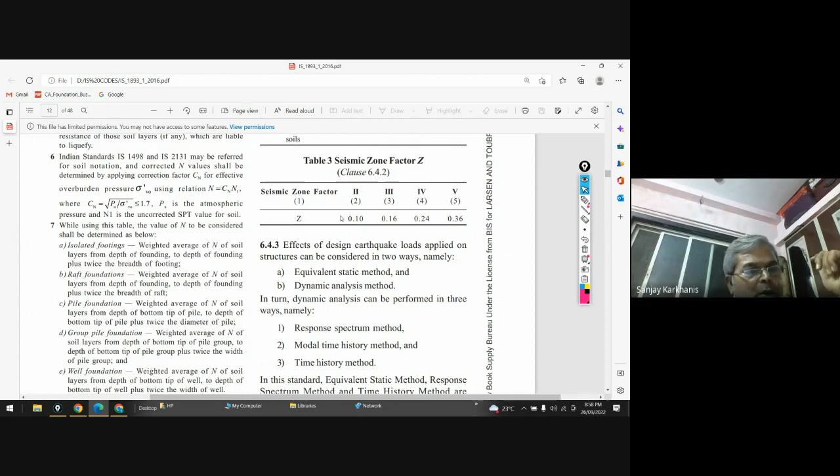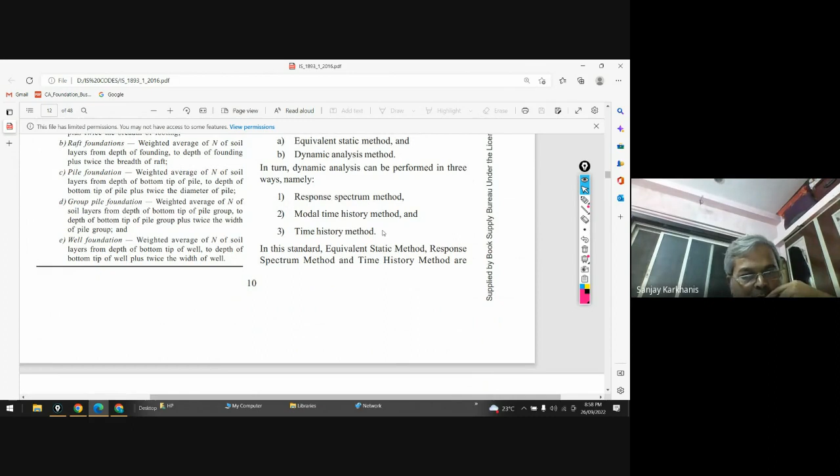So you can see right now, dynamic analysis agar karna hai. Effect of design earthquake loads applied on structure can be considered in two ways: equivalent static method, dynamic method. Then in dynamic method, you are having response spectrum method, modal time history method, and time history method. So ये टू एडवांस्ड है. आप यहाँ पर भी काम किया तो I think it is more than enough, but those who are interested, they can go ahead with this modal time history. Okay, then in the standard, equivalent static method, response spectrum method, time history method are used.

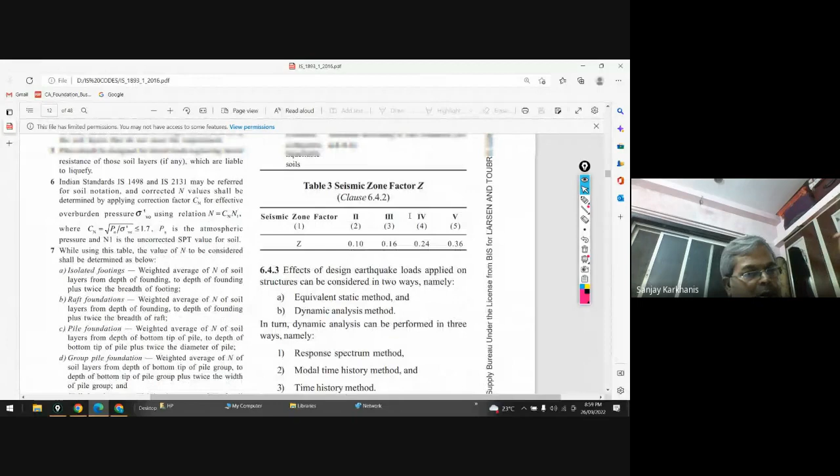यस सर, तो अगर कुछ एडिशनल पढ़ना पड़ेगा, मैं सारा कुछ तो नहीं ले सकता हूँ. Particularly this type of soils, if you were very good in foundation engineering, you can go through this MI, MH, CI, CH. So these are the different types of soft soil. So that has been characterized in soil dynamics or soil mechanics, let's say foundation engineering. So you can go through this and check the compressibility etc., all that, so that you will understand why the code has defined type A, B, and C. Right now, he is going for this, but we are not designing anything in type D. So you can see unstable, collapsible, liquefiable soils.

Now, liquefaction is again one advanced concept, or say advanced soil engineering concept. And I will say that if you come across such sort of soils, better don't design the building in that area, because that liquefaction is a very, very complex process, and many times you may have understood that soil, what is called boiling, that is sand boiling or bubbling. So the soil gets converted into liquid, and that is called unstable, collapsible, and liquefiable soils. So that soil absolutely loses all its shear strength, and it becomes just like a liquid. And then you can see what will happen when your building is resting. Just try to compare that condition with a ship standing in sea. So you will feel that is a liquefiable condition.

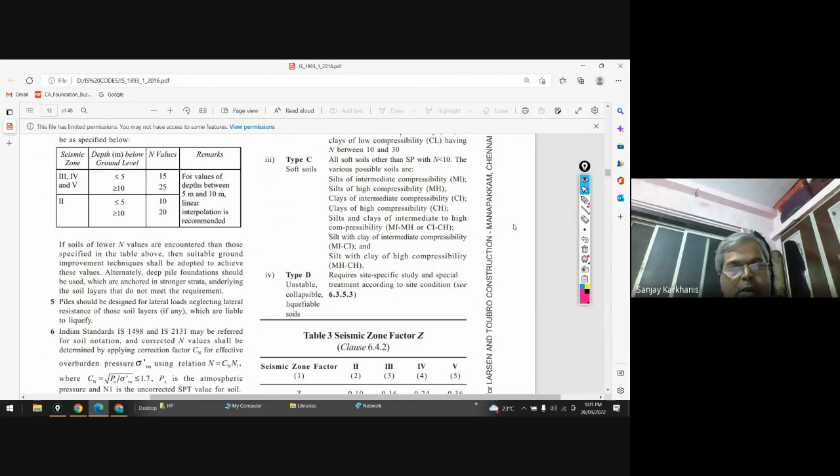Yes, yeah, that's why you can see that. And if you have any queries, you can ask me. But I think today you people might have gotten bored a lot. वो करना पड़ेगा, कभी ना कभी करना पड़ेगा. But all of you are still there. That means at least you have enough daring to stay with whatever I was just saying.